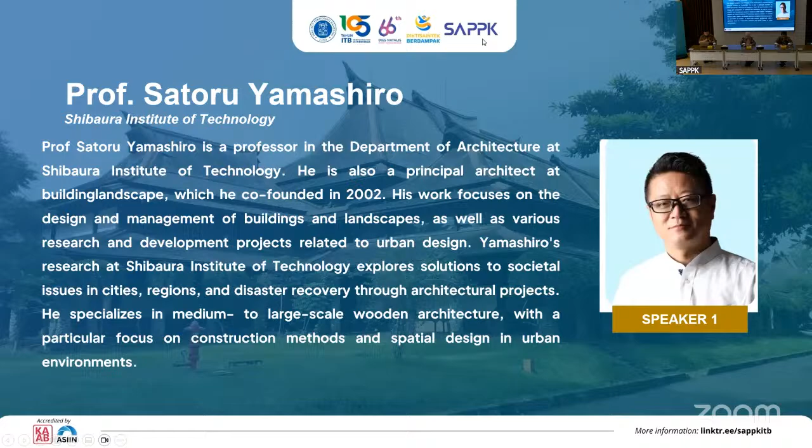Thank you very much, it's my great honor to be here. Last month in August, I visited Indonesia, some universities like IPB, ITB, and UGM. I had a very nice conversation together with the researchers and professors there. So I would like to start my presentation.

Okay, can I start? Yes. Okay, so today's title is The Rise of Urban Mass Timber, Japan's Role in the Pacific Rim. As I introduced, I'm a professor of the School of Architecture, Shibaura Institute of Technology, and director of the Research Center for Sustainable Building Engineering, Shibaura.

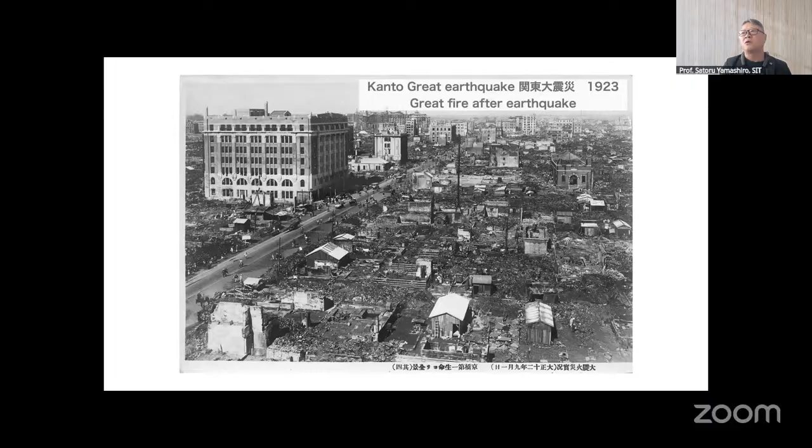We also had great bombing in 1944 and 1945. Another 100,000 people died from this bombing, and the city was burned out. Even during reconstruction from the damage of World War II, we still had many natural disasters, not only earthquakes but also typhoons. One of the biggest was the Isewan typhoon in 1959.

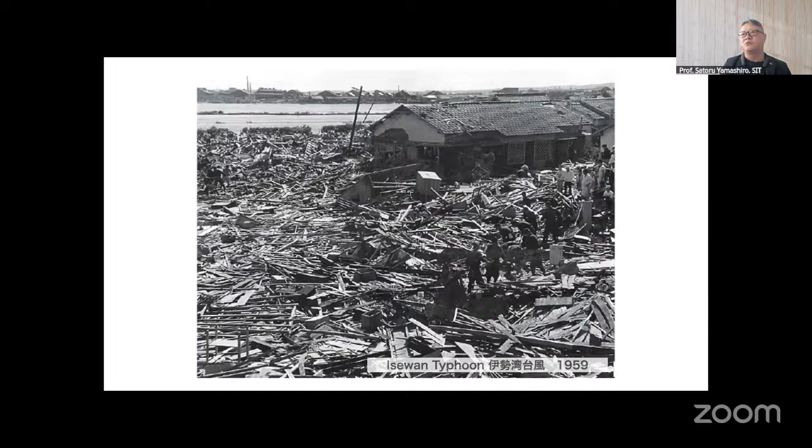We established the modern building standard after World War II, but after the Isewan typhoon we made a resolution on building disaster prevention in 1959. We call it prohibition of wooden construction, especially for public buildings.

So we reconstructed the cities as I showed you before. The cities were full of buildings with concrete and steel. But even after the resolution, researchers, architects, and government people continued their effort to progress our technology in earthquake-proof and fire-proof technologies.

Today we established new acts in 2010 and 2021 to promote the use of wood for public buildings also. So my aim is how to rebuild those buildings with timber.

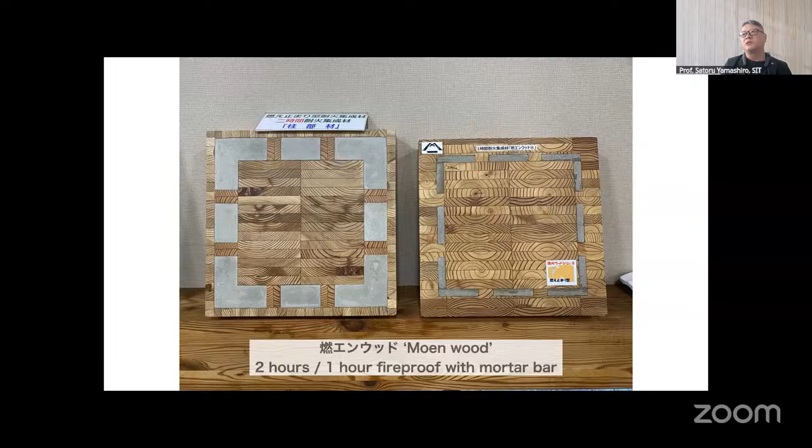This is the section of the column. The central timber structure was protected by mortar or sometimes gypsum board. It absorbed the heat of the fire. This is another example for the fireproof beam.

Obayashi Corporation, a big construction company, designed and constructed an 11-story high office building in Yokohama, in the very center of the urban condition. This is a kind of training center for the company itself, and it hosts many meeting rooms and hostel rooms for guests to join seminars.

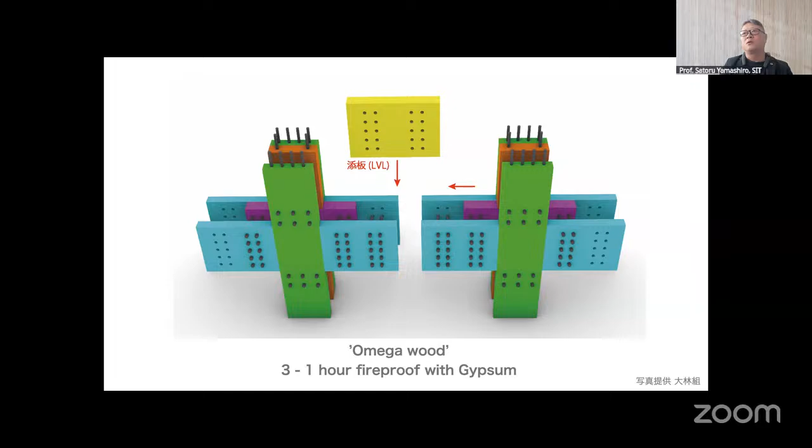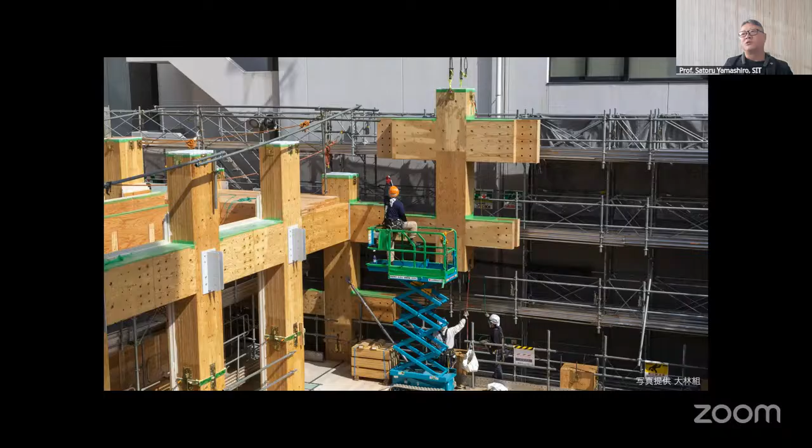Now another new headquarters office for Tokio Marine Company has started construction. The building was designed by Renzo Piano, the Italian maestro architect. It has 20 stories and is 100 meters high. This is a rendering. It will open in 2028, three years later.

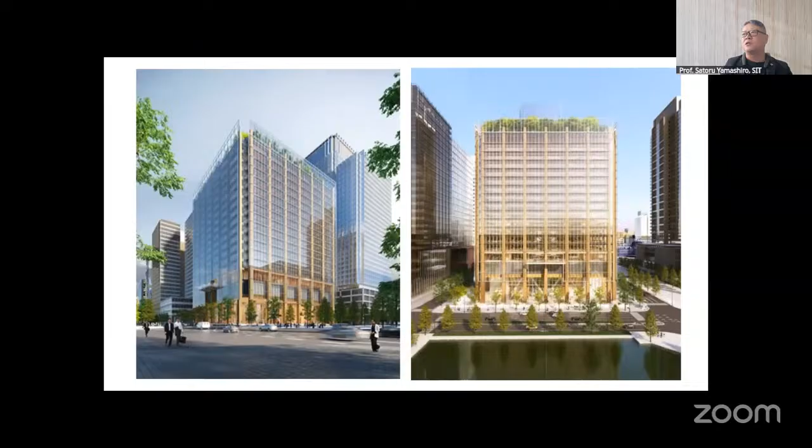From now, I would like to introduce one of my projects, just finished construction last year in Osaka. The name of the building is Riverwood Osaka-jo Castle. It has 8 floors and is 28 meters high.

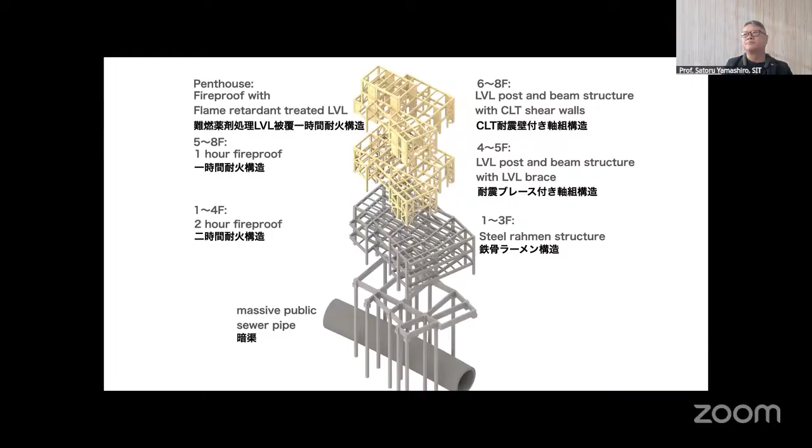To protect the structure from fire, most of the structure was covered by gypsum board. We introduced another new technology, flame retardant treated LVL, also to protect this structure from fire. Some chemically treated timber can absorb heat, and it can protect the structure from fire.

We use CLT as a seismic element. We made many joint tests to calculate the number of pins needed.

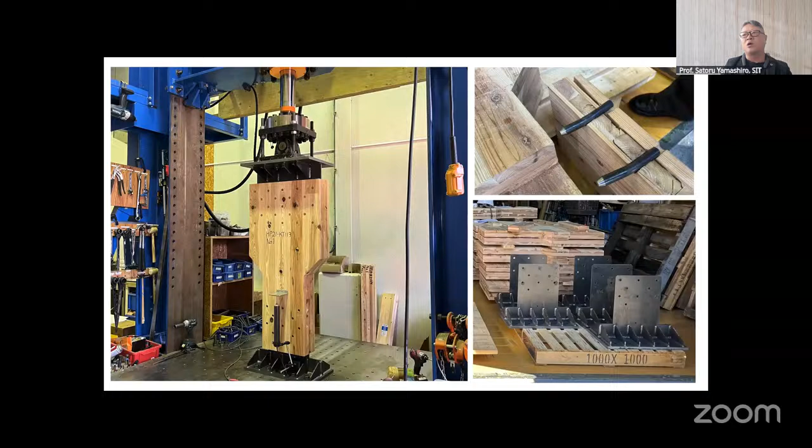Here is one picture from the construction. You can see the very massive columns and beams everywhere.

We use steel plates to joint the beam, column, and bracing together.

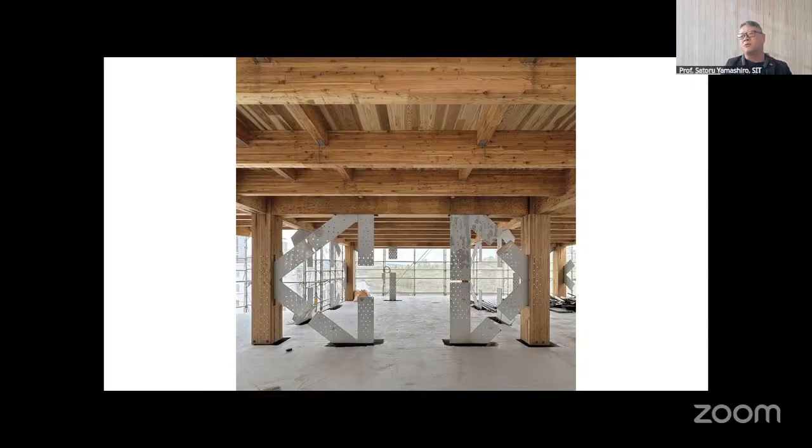To protect the structure from fire, basically we cover the column, beam, and floor with gypsum board. But as you can see, the bracing and the seismic element panel can be exposed to the interior.

So we decided to expose such a big structural element like the bracing to the interior.

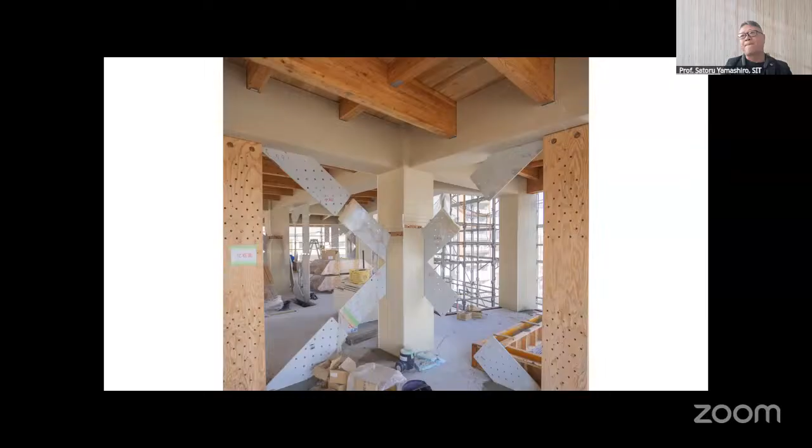This is a picture from the interior. A very massive K-shape bracing is exposed to the interior, giving a very new impression to mass timber construction.

The beam and column are covered with gypsum board. To use the CLT panel as a seismic element, we connect the CLT panel to the beams with steel plate.

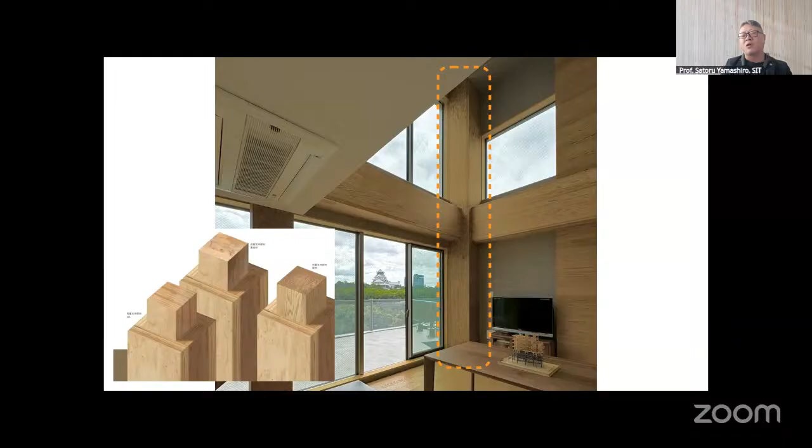This is the room for the owner. A very symbolic column was protected from fire with chemically treated LVL. This is a view from the owner's room to the castle park.

I think this could help realize a new standard for mass timber housing construction with modern technology.

While I design and construct mass timber housing, I collaborate with governmental research faculty facilities to produce prototypes of mid-scale buildings at the same time.

Of course, some people and companies continue to develop taller mass timber buildings as much as possible. But my interest is not only to build as big as possible, but to promote middle-scale buildings for society.

This is a three-story high office building model.

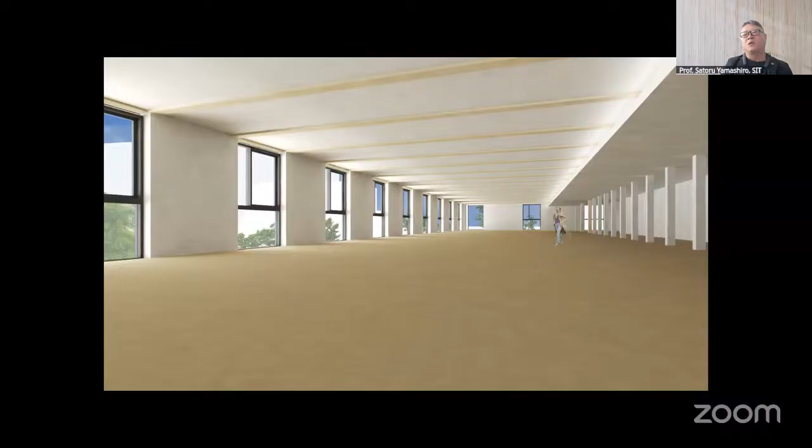Basically, most of the column and wall can be protected with gypsum board from fire.

We also designed another 4-story high model. It has a more open feeling, and the seismic element is not a panel but a big bracing that works as the seismic element.

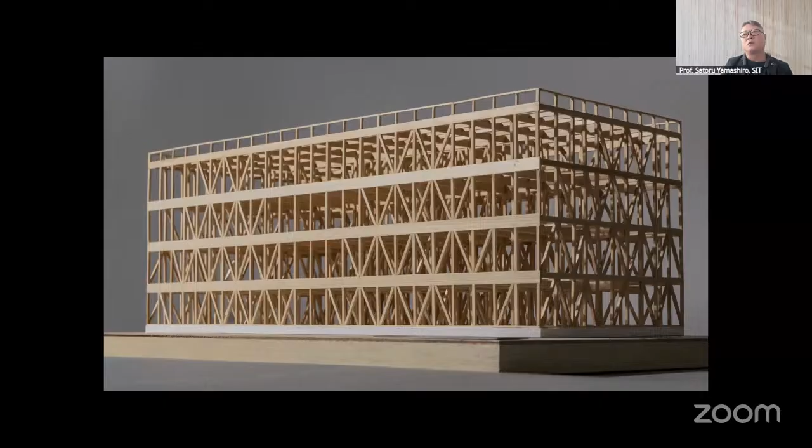It gives a more open feeling, and it can be used in many different arrangements according to different office layouts.

To promote this kind of medium and large scale wooden construction, I'm a member of the organizing team of a portal site website to share the knowledge.

Today's presentation, I will talk about technology in traditionality: development of prefabricated traditional joints and simulations. Actually, this combines my dissertation and my current research about prefabricated traditional joints.

Research background: why did I choose this topic? This is because traditional timber joints are important for supporting the rigidity of traditional buildings against gravity and lateral loads. Studying traditional timber joints contributes to understanding the behavior and performance of traditional joinery techniques and how to preserve traditional buildings. Two studies are currently explored: the first is how to analyze the performance of traditional joint systems, and the second is fabrication of traditional joints using CNC milling.

The conventional connection performance analysis from timber standards only regulates the dowel type connection, which uses metal material. The connection performance that can be calculated is load carrying capacity, based on the failure modes that happen in two types of connection: single shear connection and double shear connection. Limited to this, the calculation is based on the failure modes that happen from the many iterations of traditional joints, and the goal is to find the capacity before the connection is damaged.

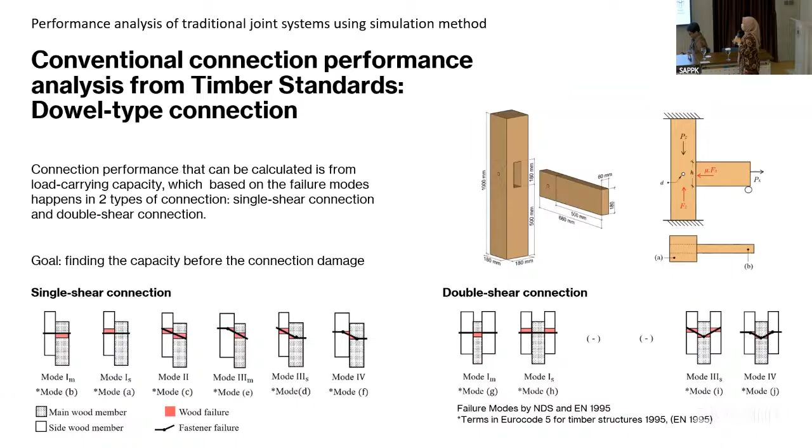When we calculated the load carrying capacity, we found that between two popular standards, National Design Specification from America and Eurocode from European countries, the NDS standard is more conservative than the Eurocode standard. From this formula, we can find the performance of the connection in the vertical direction and also the lateral direction.

But it will depend also on the adjustment factors based on the purpose of the simulation and calculation. I also made validation using numerical analysis, and the load for the simulation in finite element modeling is adjusted to the load carrying capacity from NDS and Eurocode calculation.

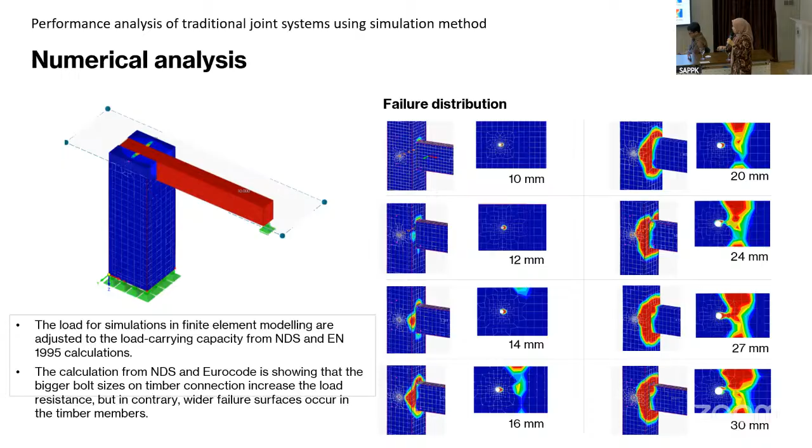I also checked the analytical analysis from the mortise and tenon joint that I chose to analyze. This is based on the Tsai-Wu model and Norris model, which are usually used for orthotropic materials that have multi-directional strength and stiffness.

And here is also convergence with the results from numerical analysis, that usually the beam members are more likely to fail than column members. Yeah, which is convergence with the calculation.

And I also analyzed the traditional timber joints using a parametric study, and I chose 14 joints to check the performance of each joint and which one has bigger capacity than the others. And I also categorized the joints based on their capability of resisting force, dividing them into two types: tension joints and compression joints.

The dimension, limit, and proportion of the model size is from the National Research Institute of Cultural Heritage in Korea. So basically, why I chose Korea, because my PhD is there, and several types of joints are also similar within Indonesia. So I chose that one because of that.

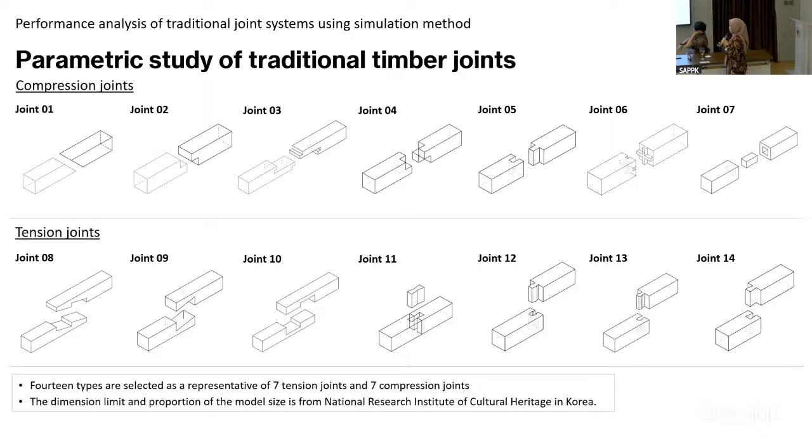And the model setup in the numerical analysis is like in the figure on the left side. And then the material properties are also determined within the material library in the software. And the result is...

Also satisfied that the movement of the joint when we add the tension force is similar to the actual experiment or test. And here are some of the results. Actually, I have all 14 joints, but I only mention three here.

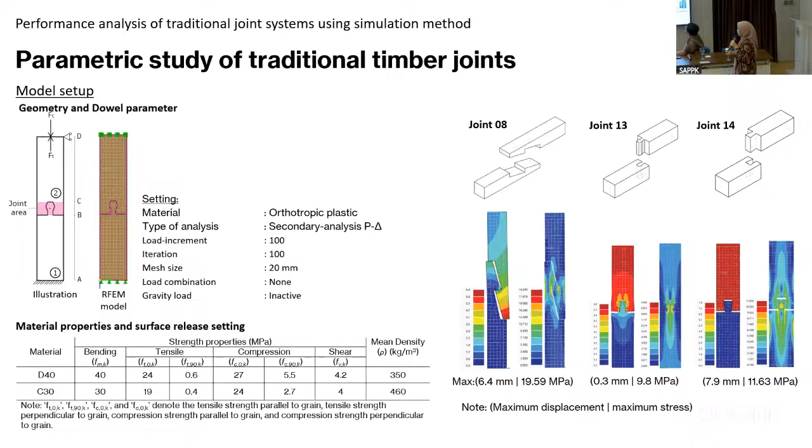And how we know whether the model is correct or not is based on the prediction of deformation and contact behavior. This is formulated based on previous studies and also how the movement of the connection itself works. So here we have diagonal friction and compression, and then full compression, and then full friction. And from this, we know what happened in each connection.

So after we did the experiment and simulation, we found several behaviors and performances of each connection, which can be divided into new categories. Based on the shape behavior, we have hook type joints and locking type joints.

The hook type joints have the characteristic of having the same shape between male and female members. And they have good performance when they have a long joint area, and good resistance on tension loads, and usually the surface contact is less than 7.

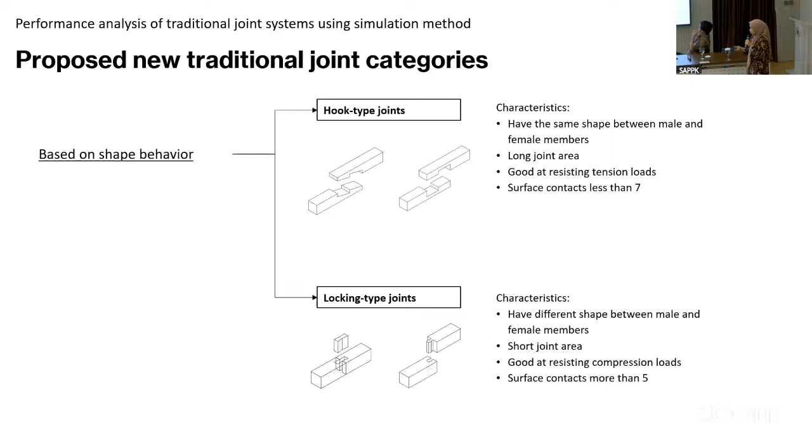And based on the tension behavior, it is divided into two types of joints: the friction type joint and the bearing type joint. The characteristic of friction type joints is that the joint relies on the friction surface, and because of that, additional dowels have a significant impact on the strength and stiffness of the joints. In contrast, in bearing type joints, the connection depends on surfaces that bear against each other and mainly relies on compression strength. So additional dowels only serve to prevent pull-out rather than prevent the connection from failing.

And after creating the method to analyze the traditional connection, I also wanted to move into how to make traditional joints easier and able to be prefabricated in the future. So the background study of traditional digital fabrication in traditional joints, I mention only two here.

Kanasaki and Tanaka's research about the patterns of traditional joints to be developed in a digital fabrication environment, which is CNC milling. And then Larsson et al. 2020 created a system to make Japanese traditional connections fabricated using CNC milling.

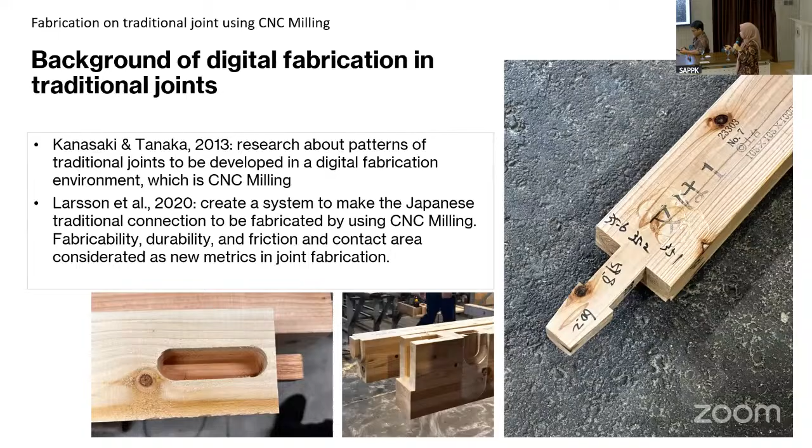And the ground theory of traditional joint fabrication includes connectivity, bridging, milling direction, checkerboard, fabricability, durability, contact area, and friction area. But right now, most factories usually already use this kind of approach, but it is limited to mass production. So in my research, the goal is how to make traditional joints become more diverse and explored more than just the traditional ones that we already know.

And this is the preliminary prototyping in digital fabrication of traditional joints. So in our building, we have this CNC milling machine, but we still need to develop the method and procedure to make it more effective and efficient.

And here is the first prototype, which is not finished yet and still being developed. But the goal is to make traditional joints able to be fabricated.

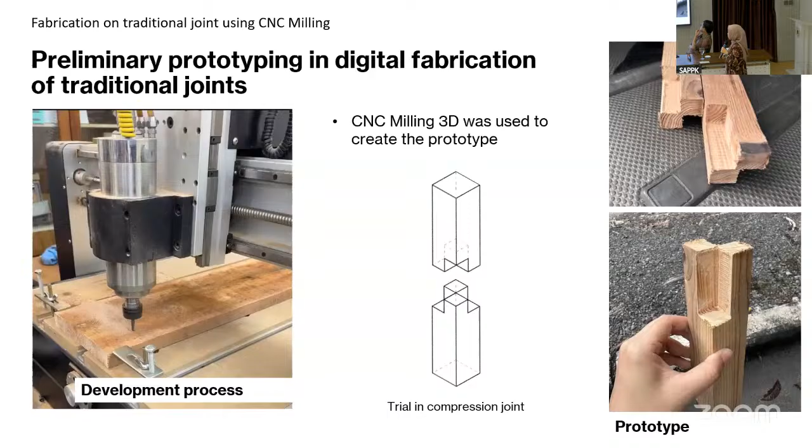So the further research goals I want to achieve: first is the development of a traditional timber joint fabrication system based on machine capabilities and efficiency. Then the formulation of traditional timber joint performance analysis for preservation and conservation of traditional buildings. And then study of strengthening methods of traditional timber buildings in Indonesia and how to apply them.

Structural investigation on traditional timber structure to understand Indonesian traditional buildings under lateral loads, which is still lacking development right now. Then exploration of more natural material for building structure to reduce carbon footprint in construction. And exploration of folded plate structure using timber material, which is actually my thesis in my master's degree.

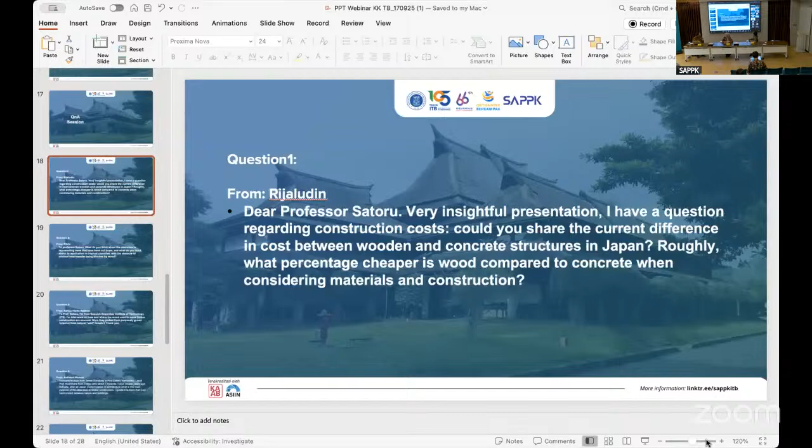The question is regarding construction costs. Could you share the current difference in cost between wooden and concrete structures in Japan? Roughly, what percentage cheaper is wood compared to concrete when considering materials and construction?

Thank you for your question. Actually, modern mass timber construction is more expensive compared to concrete structure, but today around 5 or 10% more expensive compared to moderate, popular concrete construction. I don't know the situation in Indonesia, but in Japan, the cost for concrete construction and steel construction is getting steeply more expensive. So the cost for mass timber can become equal in the near future, I think.

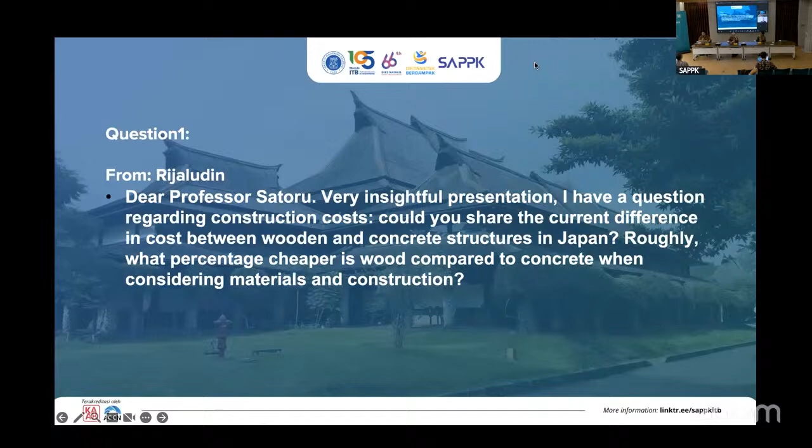Okay, please, Sensei. Sorry, I didn't ask clearly, but I think it's not clear what minimal heat transfer blocked by wood means. Did it talk about thermal insulation for the building, or how people can touch the cold thermal mass or not? Makes sense? Okay, maybe Fibria can give more context to the question. Sorry, I couldn't clearly understand your question. Okay, you may unmute first, Fibria, to give more context to the question.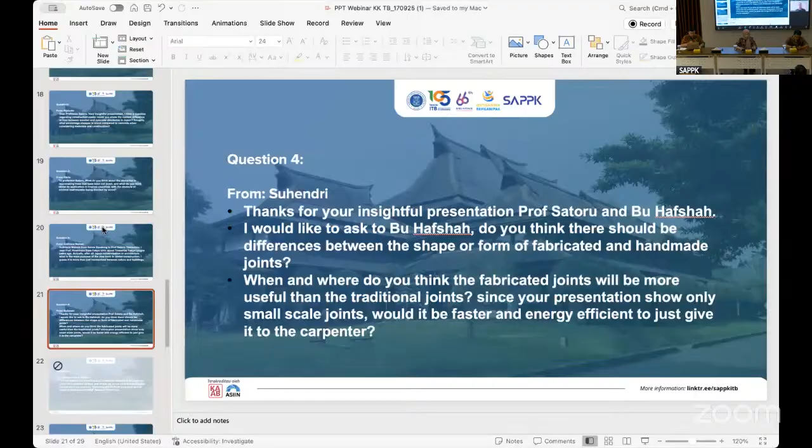Please, Sensei. Yeah, thank you very much for your question. I have a very close contact with Professor Koshihara, so I'm also influenced by him very much. I'm a member of the Timberize association, and we have many reasons to start mass timber again in Japan. One is harmonization, but we also have many economical reasons.

As you know, especially European or American companies or investment companies are investing money in the so-called ESG movement - ethics, environmental, social, governance things. So Japan also needs to attract such money, and carbon neutrality is one of the most important aspects of our development in Japan. To realize decarbonization or a carbon neutral society, mass timber is very much focused on today in Japan, I think.

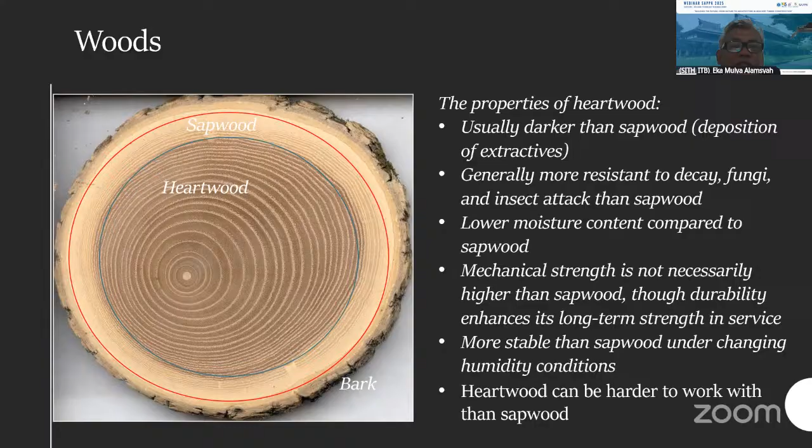Chemically, all wood is composed of cellulose, lignin, hemicellulose, and minor amounts, usually less than 10%, of chemical extraneous materials. Variation in the proportion of these components makes wood heavy or light, stiff or flexible, hard or soft, and affects its degree of durability.

In fresh wood, some key advantages include: fresh wood has natural beauty with unique grain patterns and texture that add warmth and character to any space. High quality fresh wood can be incredibly durable and long lasting, making it a great investment for furniture and construction. Wood is a renewable resource, especially when sourced from responsibly managed forests. It's highly versatile and can be used in a wide range of applications, from construction to furniture. Wood has excellent acoustic properties, which is why it is often used in musical instruments and spaces designed for listening to music. It has natural insulating properties, helping to maintain comfortable indoor temperature.

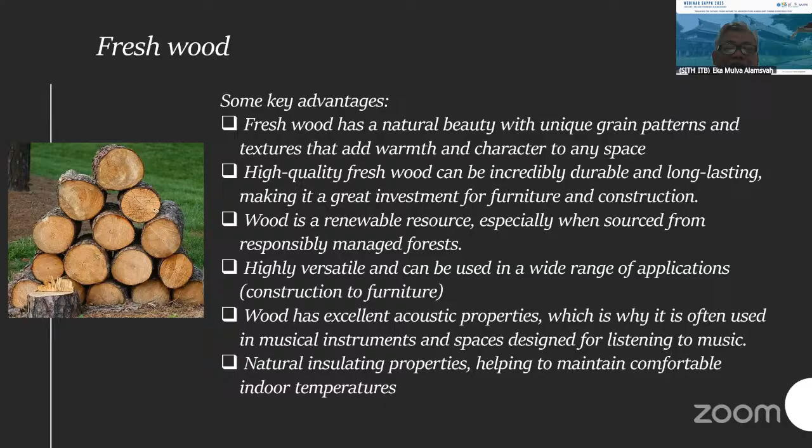However, during the post-harvest period, timber is prone to fungal and insect attack during storage as the moisture content is very high. On a freshly cut tree, the moisture content can be anywhere from 30 to 45%. This is called greenwood or green moisture content.

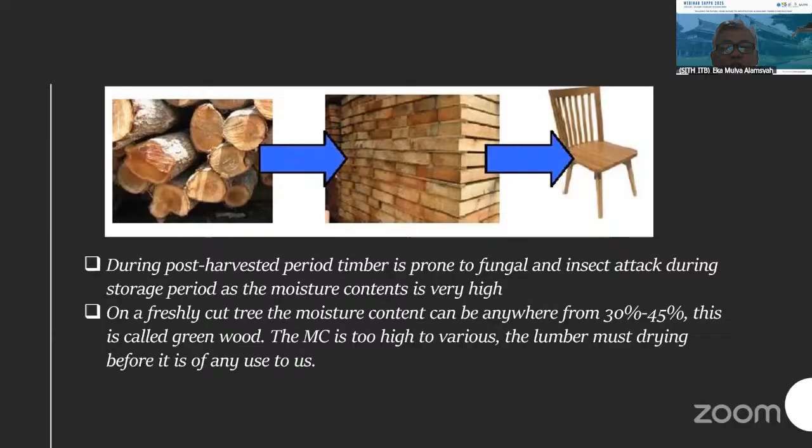By physical and mechanical effects, wood can be degraded. Some occur as change in cross-sectional dimension, like swelling and shrinkage. Strength and stiffness decrease as moisture content increases. Durability is affected, and coating can be compromised, especially covering the surface part of the wood.

Chemical effect of degradation in wood can be color change, such as yellowing, darkening, or graying. Reduction in pH causes it to become more acidic, with decline in strength, elasticity, and dimensional stability, and increased porosity due to cell wall breakdown.

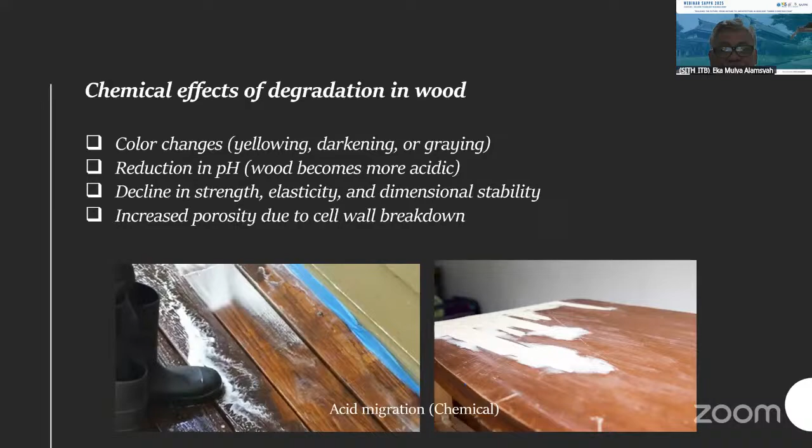Biological effect of degradation in wood is driven by fungi, such as brown rot, dry rot, soft rot, and insects such as termites, beetles, and ants. Their combined effect includes loss of structural integrity, discoloration, tunneling, and eventual collapse of wood material.

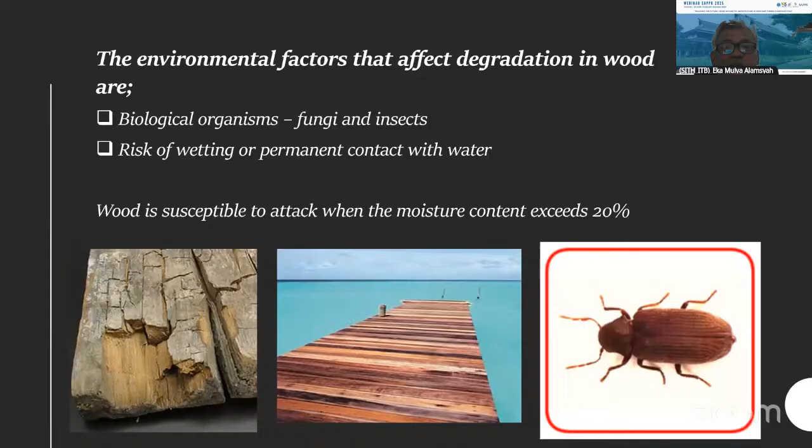The environmental factors that affect degradation in wood are biological organisms, such as fungi and insects, and risk of wetting or permanent contact with water, as you can see in the middle of the picture here. Wood is susceptible to attack when the moisture content exceeds 20%.

In chapter 2, I'd like to talk about quality enhancement of wood. Some of the problems when we use wood are that it is not resistant to humidity, and there is an effect of ultraviolet instability. The dimensions are unstable, and it lacks resistance to fungal, insect, and weathering damage. The surface is soft. Because of that, we have to improve the quality of wood before we use it as a product.

How to solve these problems? There are many methods. First, using high quality wood. Second, using naturally durable wood. Third, using wood preservative. Fourth, use dry wood. And the last one, use of technology in wood treatment.

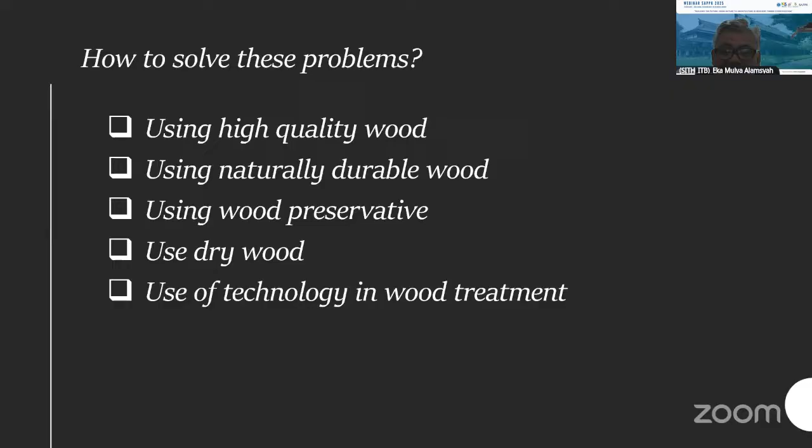On the other hand, since the 2000s, the government has supported the people of Indonesia to grow trees in plantation forests. So that until this year, we can see that wood from plantation forests is leading to support or supply wood material to the wood industry in Indonesia. However, this policy has resulted in the use of wood of lower quality compared to the wood quality from the natural forest.

Because of that, we have to use some methods to increase the quality of wood with technology. First, wood drying technology. Forest products, especially wood, contain a certain amount of water in them which must be removed because it has a very detrimental effect on their use. The process of removing the water content in forest product material is called wood drying.

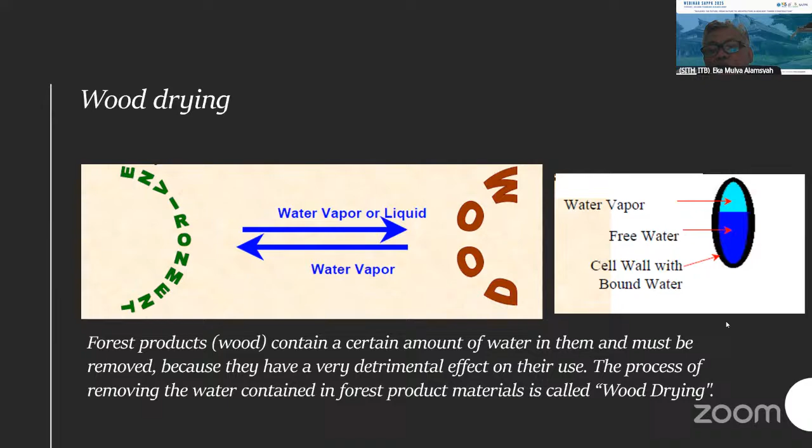Common defects in wood drying include crook, bow, twist, cup, collapse, surface checking, internal checking, and internal stresses. Distortion can be the consequence of a number of factors, including variable shrinkage of wood in different directions or at different angles, and excessive internal stress.

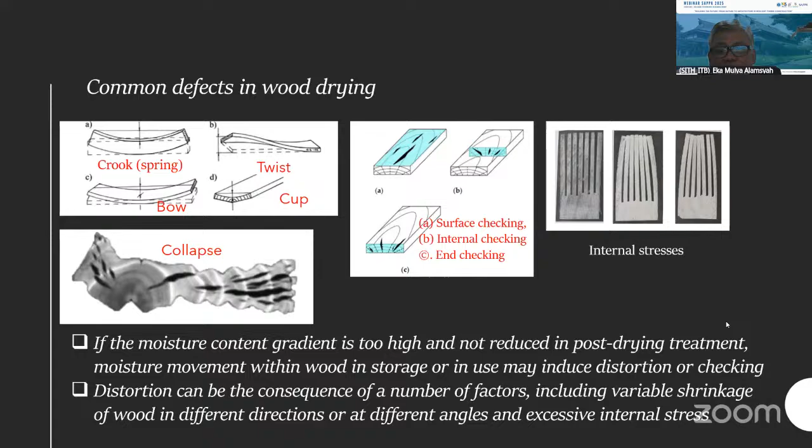Drying is an effort to ensure the stability of the size of wood before use. Below the fiber saturation point, change in moisture content can result in swelling or shrinkage. On the other hand, if it is dried too close to the environmental water content, the swelling and shrinkage characteristics will be overcome and can even be eliminated.

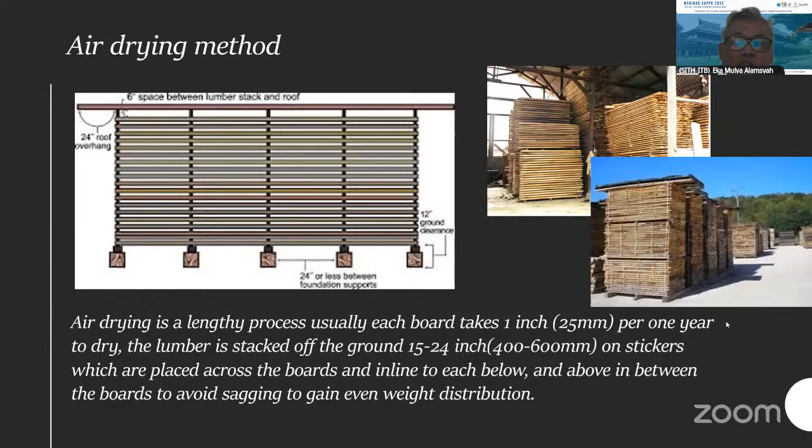This is some methods in the drying technology. First is the air drying method. Air drying is a lengthy process; usually a board takes 1 inch per year to dry. The lumber is stacked off the ground 15 to 24 inches on stickers, which are placed across the board and in line above and below each other, in between the boards, to avoid sagging and to gain even weight distribution.

The second method is the kiln dry method. Kiln drying is a faster but controlled process where humidity and temperature are controlled using steam and fans for drying. The drying process normally takes between 6 to 8 weeks. Because of its fast drying due to high temperatures, the cell collapses quickly rather than slowly as it would with air drying, making it unstable.

The second technology is wood preservation. During the post-harvest period, timber and bamboo are prone to fungal and insect attack during storage as the moisture content is very high. The types of insects include termites and wood borers; the types of fungi include rotting fungus, softening fungus, stain fungus; and the last type is marine borers, mollusca and crustacea.

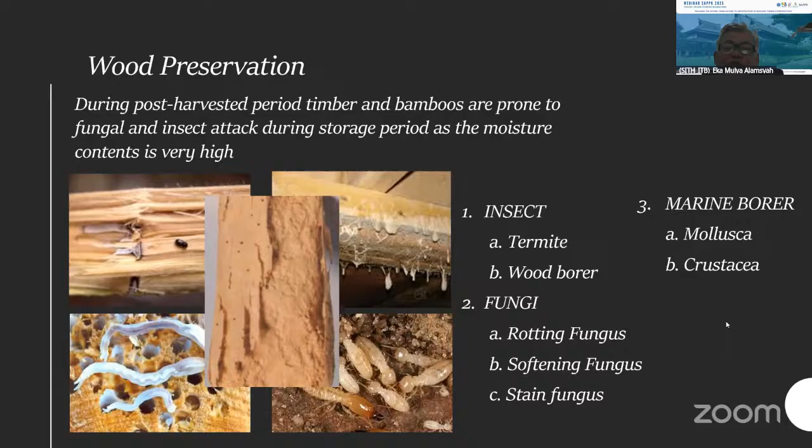Wood preservation is chemical and/or physical treatment of wood to extend its useful life. In everyday reality, what is meant by wood preservation is the process of inserting chemicals into wood to increase its durability. The purpose of wood preservation is to incorporate preservative into the wood so that continuous layers of treated wood contain

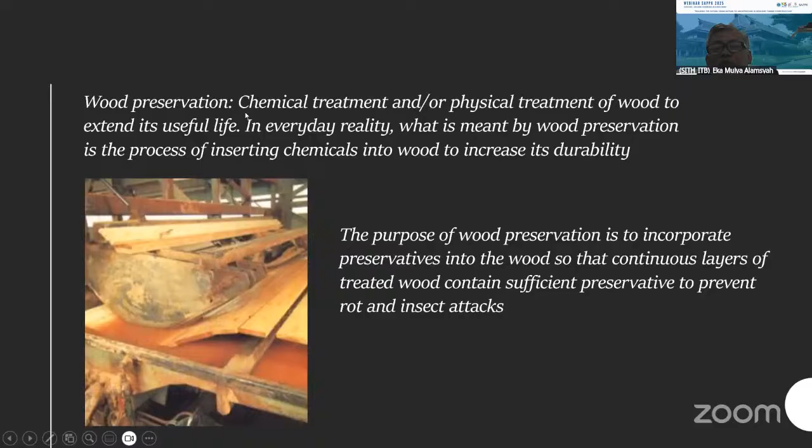sufficient preservative to prevent rot and insect attack. These are some methods of wood preservation. We can see from the simple method to the high technology method. First, we can use the coating method, spraying method, dipping method, soaking method, sap displacement method, and diffusion process.

The last one is the vacuum pressure method. This method is highly recommended for preserving wood that will be used in the construction of bridges, cooling towers, ports, and residential buildings, because the preservative material can be easily incorporated with the cell of the wood compared to the other methods.

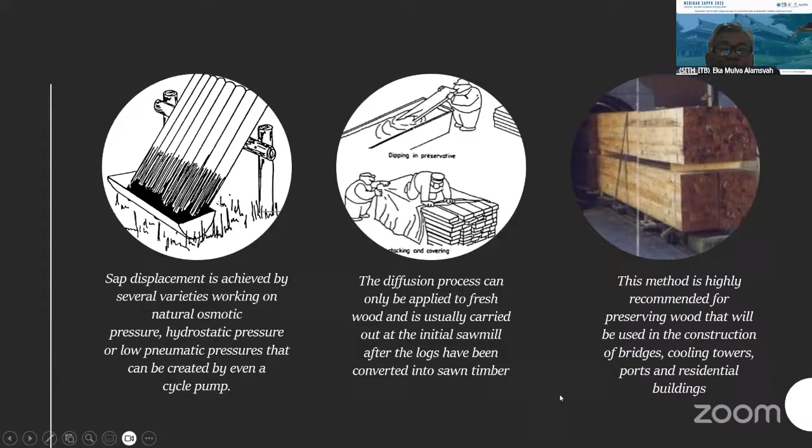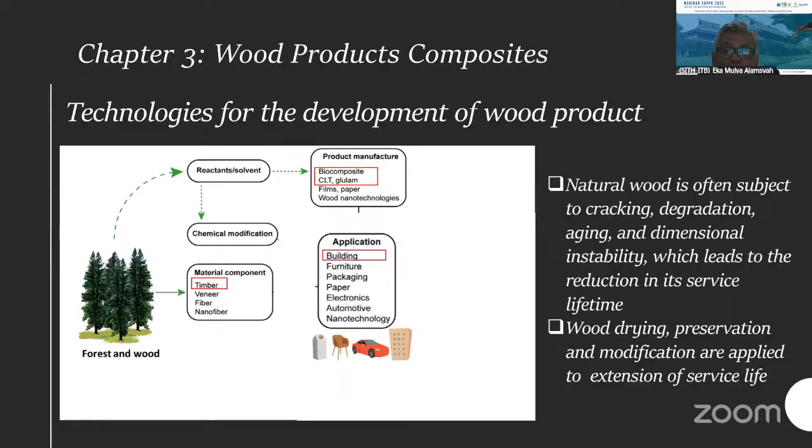And chapter 3, I'd like to talk about wood product composites, technologies for the development of wood products. Natural wood is often subject to cracking, degradation, aging, and dimensional instability, which leads to a reduction in its service lifetime. Wood drying, preservation, and modification are applied for extension of service life, especially in material components of timber or biocomposite CLT and glulam for building application. It is a kind of wood product composite.

Wood product composites are engineered materials made by combining wood elements—veneer, strand, or particles—with adhesive, resin, or other additives to produce materials with enhanced strength, durability, stability, and versatility compared to solid wood. Some wood product composites include LVL, PSL, LSL, OSB, plywood, particle board, and fiberboard.

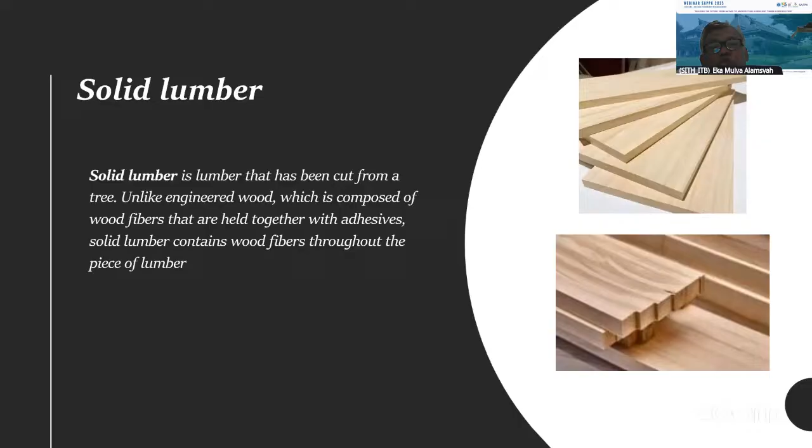Solid lumber is lumber that has been just cut from a tree, unlike engineered wood, which is composed of wood fibers that are held together with adhesive. Solid lumber contains wood fiber throughout the piece of lumber.

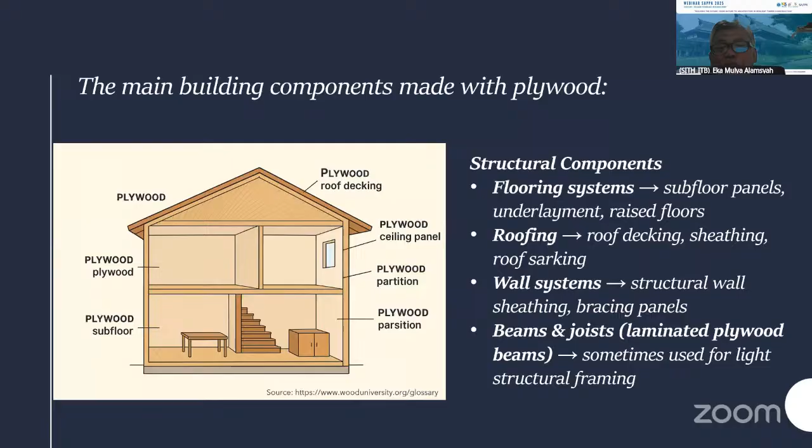Plywood is widely used in building components because of its unique properties that make it stronger, more stable, and more versatile than solid wood—strength and stability with the grain direction alternating at 90 degrees. Plywood also has dimensional stability. The main building components made with plywood are structural components such as flooring systems, roofing, wall systems, beams, and joists.

Second is hardboard, also called high-density fiberboard or HDF, a type of fiberboard which is an engineered wood product. It is used in furniture and in the construction industry. The main building components made with hardboard are wall and ceiling panels, doors, screens, flooring, underlayment, furniture panels, and sometimes exterior siding of tempered wood.

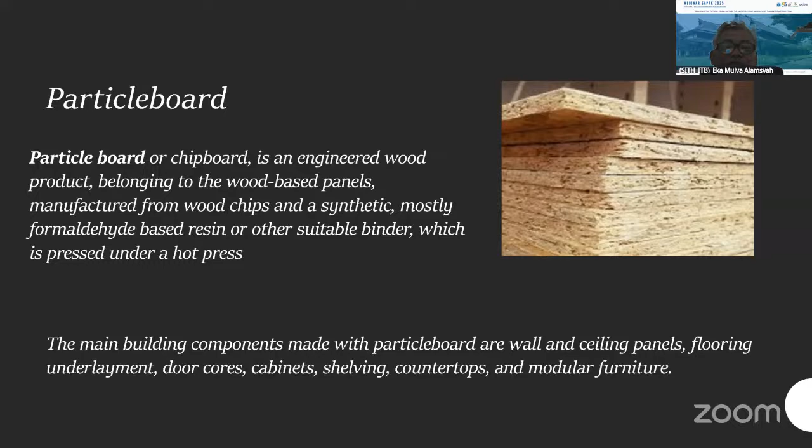Particle board or chipboard is an engineered wood product belonging to the wood-based panels, manufactured from wood chips and a synthetic, mostly formaldehyde-based resin or other suitable binder, which is pressed under a hot press. The main building components made with particle board are wall and ceiling panels, flooring underlayment, door cores, cabinets, shelving, countertops, and modular furniture.

We can see a comparison among plywood, hardboard, and particle board. Plywood: strong, stable, and available in large sheets, suitable for both structural and decorative purposes. Hardboard: very smooth surface but dense, used mainly for non-structural components, with a tempered version for limited exterior use. Particle board: economical, flat and smooth, but less strong and less moisture resistant, mainly used for interior function.

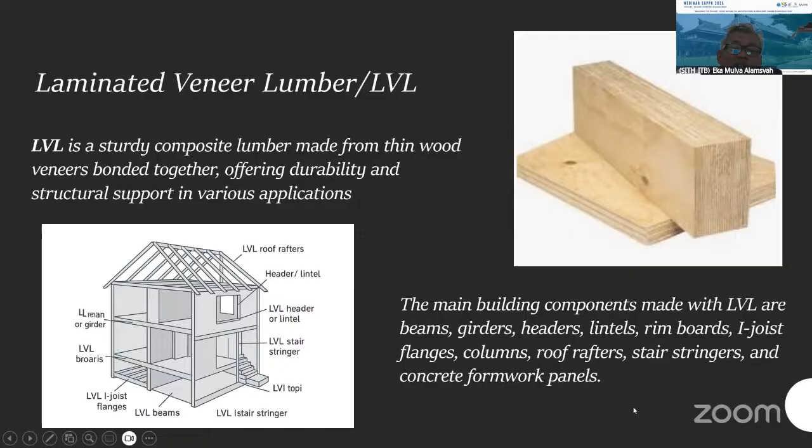Next is laminated veneer lumber, or LVL. LVL is a sturdy composite lumber made from thin wood veneers bonded together, offering durability and structural support in various applications. The main building components made with LVL are beams, girders, headers, rim boards, I-joist flanges, columns, roof rafters, stringers, and concrete formwork panels, like in this picture.

Cross-laminated timber, or CLT, is an engineered wood product consisting of layers of kiln-dried dimension lumber oriented at right angles and glued to form structural panels. The main building components made with CLT are load-bearing walls, floor slabs, roof panels, stairs, elevator/stair cores, and modular building units.

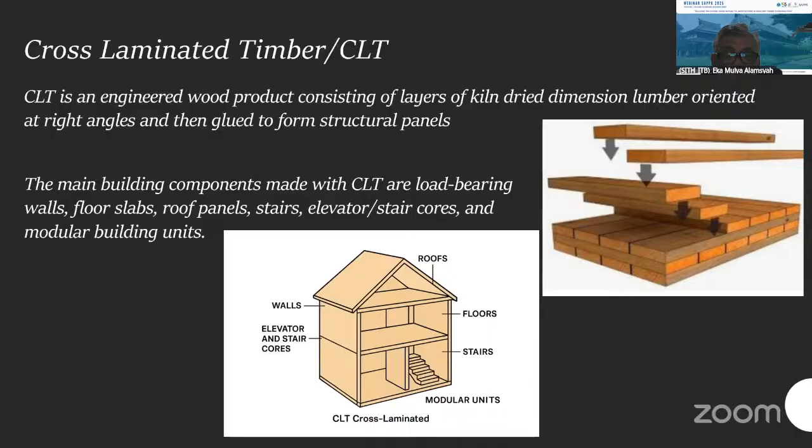Oriented strand board, or OSB, is also a kind of wood composite. OSB is a versatile engineered wood panel crafted with waterproof heat-cured adhesive, featuring rectangular wood strands arranged in cross-oriented layers. The main building components made with OSB are walls and roofs, floors, subflooring, joist webs, side panels, and modular building units.

And the last one is hybrid composite. Hybrid wood composites are engineered materials made by combining wood, natural fiber, fine particles, or strands with other materials such as polymers, metals, or different types of wood-based composites to enhance performance.

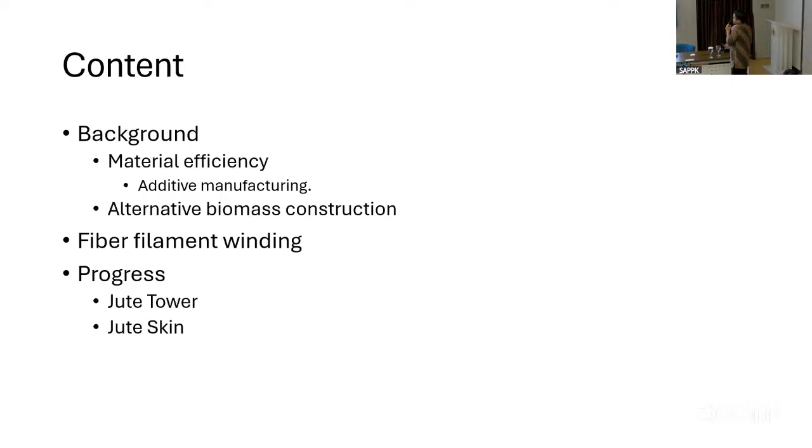First is the background. Much of my research is concerned that the current construction industry focuses on increasing the efficiency of the process of making buildings and components, but less on the material itself. We make rectangular buildings because it's easier to make, people understand it easily, and workers can work with it easily. But we all know that to distribute load, it's better to have an efficient form.

Building materials are produced to accommodate various uses. Thus the design has to be adjusted according to available building components, reducing our possibilities—like when we want to make a steel building, we have to see what's available in the market before we can design it in detail. Timber, I think, is also done this way; it's traditionally produced, used, and built with in the form of panels, planks, or beams. This makes sense—it doesn't mean it's bad, because trees grow in one direction anyway.

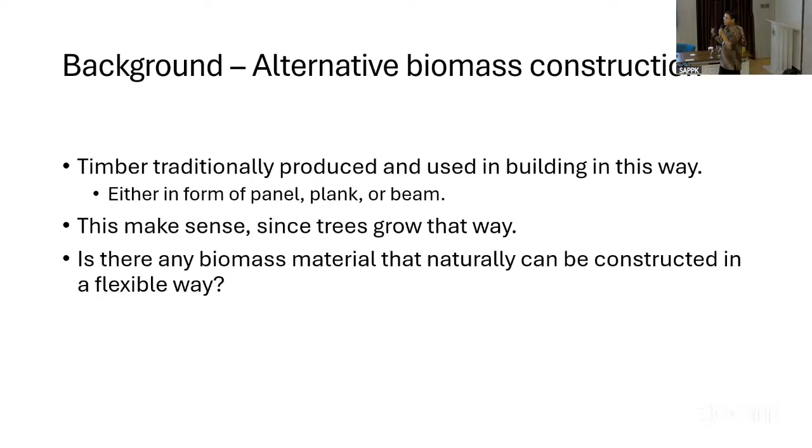So we have to make use of what's naturally grown, designing based on its anisotropic properties. But I've always been wondering if there's any other biomass material that can store carbon and naturally be constructed in a more flexible way, allowing an architect or designer to play with it more flexibly. So I'm thinking about fibers, since they are the building blocks of trees and plants—flexible and small.

However, many construction systems that use fiber have to use short fiber in random orientation—for example GRC, where we have to mix it, or Hemcrete or OSB as shown before, because it's easier to work with if we cut the fiber first. But this is counterproductive to what fiber is good for, since the longer it is, the stronger it is in tension.

So is there any way to use fiber in long form, like in the form of filament, such as carbon fiber, or a rope that already exists?

So there is a fabrication method used in the composite industry called filament winding. That's where the name comes from. It's a method where filaments are tied into position based on requirement. That's basically how carbon fiber tube is made - it's tensioned, dipped or impregnated into a resin bath, then wound onto its core. That's why they always have a core.

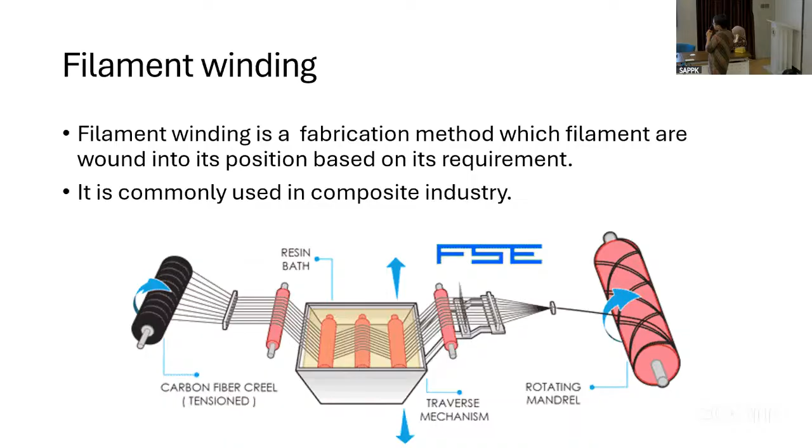Then in the architecture discipline, it was evolved by some institutions to make it bigger and less wasteful, by removing the core. Previously winding was made by molding a mold. Unfortunately this isn't in ITB yet, but what they developed is something where they still have a frame or some kind of mold, but smaller, and it expands into the actual, bigger size. If you want to make a building one by one with a whole core, imagine how difficult and expensive that is. So they call it coreless fiber winding, even though this is just one of the different methods. Basically what they're aiming for is a bigger size with less waste.

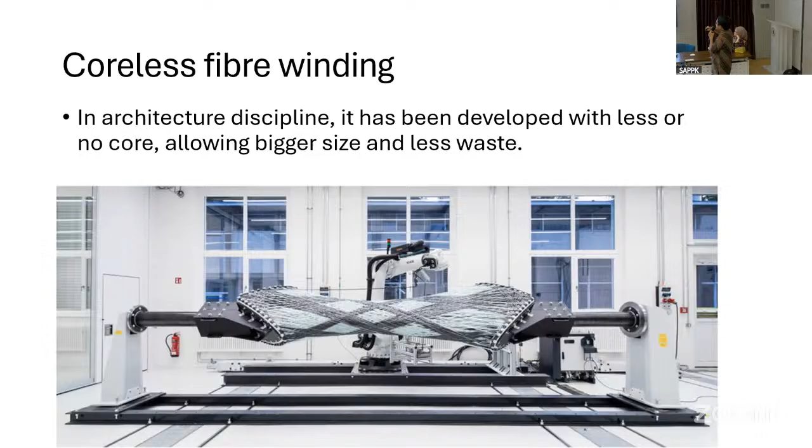The first thing I found about this technology is that we're using carbon fiber, but many institutions already start doing it with natural fiber. I think in this building they are using flax or linen. There are many institutions emerging using natural fiber in filament winding construction. This is similar to the carbon fiber method where they use resin to harden it, but there's also research using clay to combine with it.

Previously, clay and fiber were combined with mixed or random orientation of fiber. Right now they orient the fiber according to the strength required, so I think it's very efficient and very high in percentage of fiber.

Okay, so I want to explore this in my research, but reading the articles, there are a lot of milestones to be done - for example the form finding, the physical properties, mechanical properties, and all of it. When I read the journals, they affect each other. Different shapes will have different mechanical properties. Different mechanical properties of the resin, for example, will affect the fabrication and the final product, in both positive and negative ways. The type of fiber we use also affects the construction process, fabrication process, and the result, which sometimes work against each other.

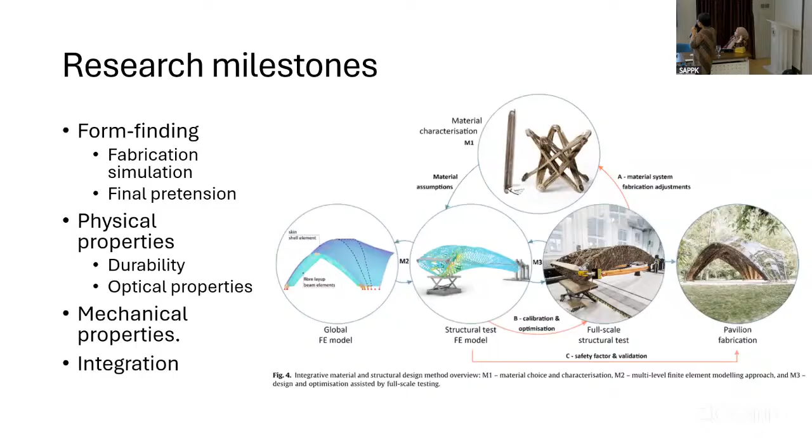So here I'm quite confused how to start. Instead, I use an exploratory approach, starting with the current boundaries that we want. So I narrowed it down into material and several other things.

For example, the material I'm using - I'll start with jute. Jute in Indonesia is called rami or karung goni. It's very commonly sold in Indonesia, whether produced locally or imported from India or Bangladesh. I think India, Bangladesh, and China dominate the market.

Also, the arm reach of the robotic arm, which ITB has, is only 1 meter in reach, without any other system or additional robots or setup to help. And also the end effector, the tool that will spin the fiber - we have no sensor or actuator yet, so the rest of the control needs to be done manually. So we start with that limitation, and we started prototyping, keeping the problem as narrow as possible first.

Fortunately we had two opportunities to explore the possibilities we have. First is a jute tower - it's an installation we showed at Atria 2024. It's a 3-meter tower installation using a panel of jute fiber integrated with natural glue. The main structure is actually the steel bar, so it has no use of strength at all.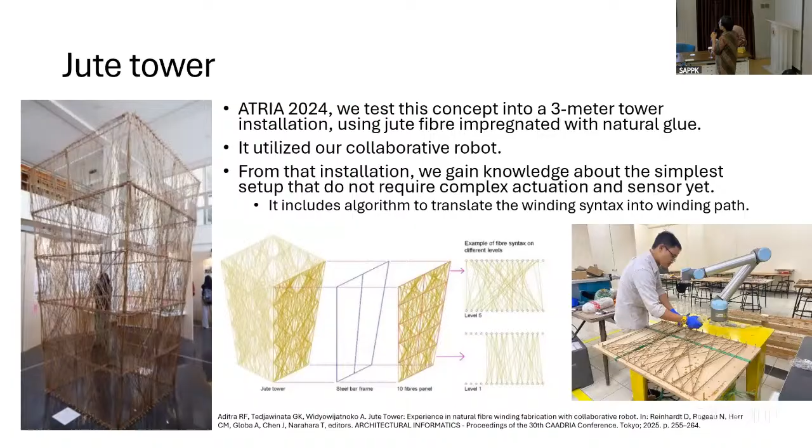So in this case, I'm not thinking about the strength, even its own strength without needing to resist any load from the outside. And because of that, there are things to improve - for example the weak tension, because it's not designed to be strong anyway.

The fiber is not tensioned well, because of its flat surface, and the resin is not strong enough for such a thin panel. It's very easily bent. Then there's low impregnation of the resin.

In 2024, we used one rope passing through the resin in this range. So in many cases, because we have to hasten the winding, the resin doesn't really stick into the rope. So we start with this to improve in the next installation.

So in the next installation, we try to have some aim. What are we actually trying to make here? The closest application that we are aiming for is a secondary skin, because to make something structural, there's a lot of mechanical properties and mechanical simulation that has to be done. So we skip that and focus, at the very least, on its own shape first.

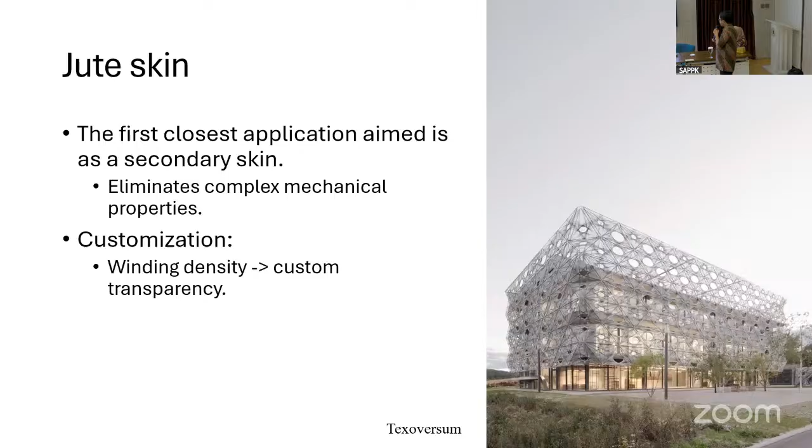The customization which the fiber filament winding can be used for is to customize the density of the winding, which could customize the transparency as a secondary skin is used for. This is an example of one building that actually uses it. It's the same institute that developed this research. This is using carbon fiber.

So first we start trying to find what form-active shape can be used. I'm going for a saddle shape, or hyperbolic paraboloid. This is the image of it in the membrane. It's a very simple shape, but it has two axes of mesh that work in two directions.

The question is how to make this kind of mesh with just one rope. It's basically connecting ropes, right? So I try to use a mock-up first. With my hand, with a rope, I try to find the concept, and we found a simple and symmetric shape.

So it's basically symmetric in four quadrants, and the direction is from here, here, here, here, here, here, here, here. Yeah, so it's very simple.

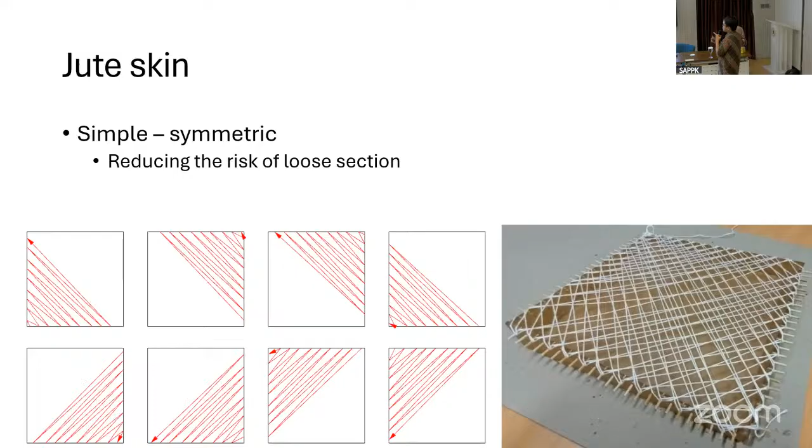It's reducing the risk of loose sections in several places. If this shape is to be lengthened in one direction, for example, there might be a chance that several areas are not touching each other between the wire.

This is also a very simple script to adjust the density. As I said before, if this is to be used conceptually as a secondary skin, we can simply adjust the density or the translucency by skipping some nodes. For example, this is without any nodes skipped, this is 2 nodes skipped, and this is 4 nodes skipped. Depending on the initial density, we can reduce it very flexibly.

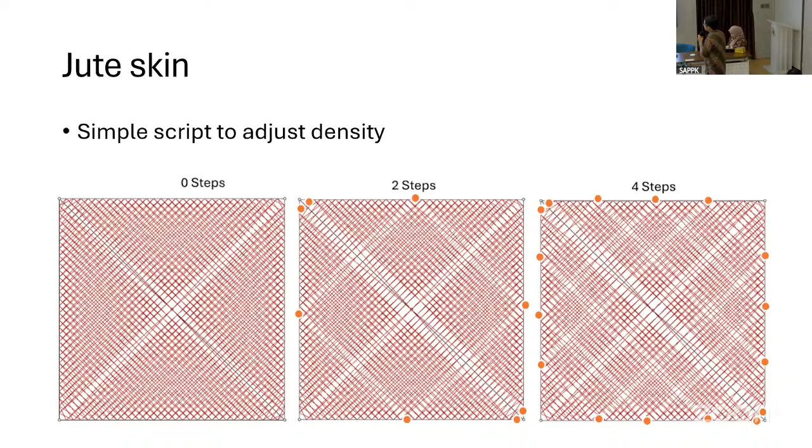Because this is a very sensitive fabrication method, we have to simulate from design to fabrication, because the design itself affects the fabrication. So through the script, we simulate the dimension, the simplified model for the aesthetic purpose, the winding path, which is the direction of the robots, and the robot kinematic simulation, which defines whether that winding path is possible for that robot.

So here we test the maximum size that we can do, the achievable curvature that we can do, and also the number of dowels.

So we also updated a little bit in the fabrication. First, previously, as I mentioned before, I used 1 rope, but this one I use 4 ropes, but smaller ropes. With that, we are able to mix it with the resin better, because it's 4 strands going out, passing through the resin. So more surface area to contact with the resin.

This is also actually good for structural purposes. Unlike my intuition, it turns out that for this technology, for this structure, a straight fiber is better than a spooled rope, because the final product is not only for tension, but also for compression. So having straight fibers in parallel with the direction of the filament is better. By using a smaller strand that is combined without any rotation, without any spooling, is actually better.

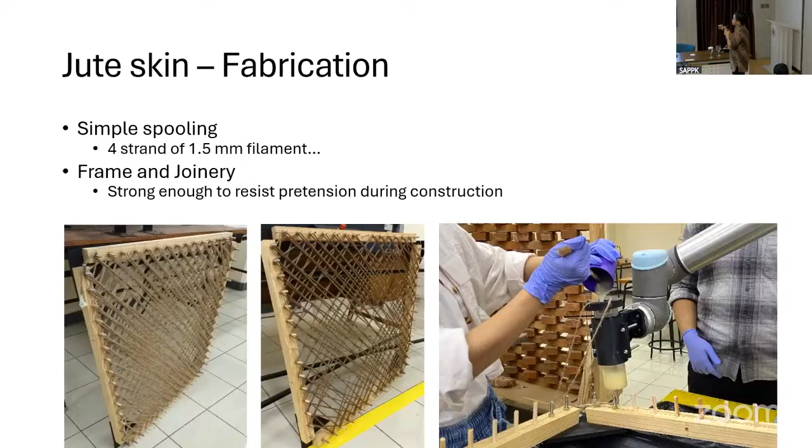Compared to the previous one, the frame is smaller, so it's only three steel bars, and in some places they can be extended to themselves, they can hold to themselves like this.

This frame is now in our basement, and I already tried cutting some of the frame, removing it from its place. What we found is that the pretension has significantly decreased—I can't even say there is pretension anymore once it is dry. So we don't really need that strong frame once it's dry. Maybe in the next step we need to separate between the frame, which will be there in the final product, and the molding, which only needs to stay in place while it's still drying.

Hopefully we can have something where right now the frame is quite thick, dominating the whole installation, even though the aim is for something very light.

So the next issue is precision. Maybe you can see it here compared to the simulation made before—this is very hollow, I would say very translucent. The number of fibers is very sparse, because we could only reduce the distance of the dowel to 4 centimeters. Previously it was 6; we reduced it to 4 centimeters between dowels, and that's already colliding frequently because we are using a plastic end effector—we 3D printed it, so it's very loose. In some way it helps, because when it collides it can move by itself, but it's less precise and doesn't allow us to make a denser dowel arrangement.

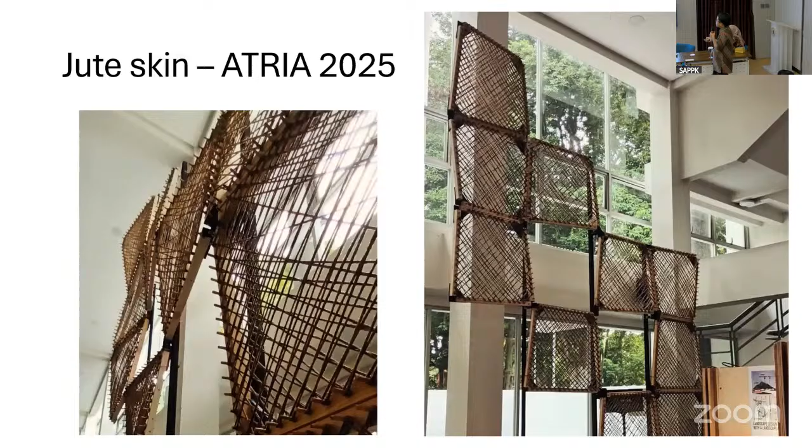So the conclusion from what we learned from these two projects so far: if there's a clear boundary and limitation on what we can make anyway, we might as well limit the problem to that boundary. Up until now, at the very least, this shape doesn't really require sensors or actuators, because during winding we don't really need to pull the wire or the fibers, or measure the tensile force at this point, and the shape is still fine. So if there is a clear boundary, we might as well limit to that problem, and you can skip some of it.

This result also shows there is potential to use natural fiber with the fiber filament winding fabrication method.

And the last thing—I think many people, when shown this research, always think about automation, but actually compared to already developed research, what we built here is very simple. We don't have any sensor or additional actuator. The robot is only used for positioning, and you can always do that manually. So in the end, we can always alter the rate of automation that we want.

The next milestone is to make something bigger—bigger design and fabrication, something like this—and to test the physical properties, for example toxicity and durability. Because right now I'm still using epoxy resin, which I know is not good against sunlight. You have to add additives, and it still only lasts up to about 10 years, if I'm not mistaken.

And the last one—this will be the last because it's the most difficult, I think—is the mechanical properties needed to shift this into a structural component. I think that's all from me. Thank you.

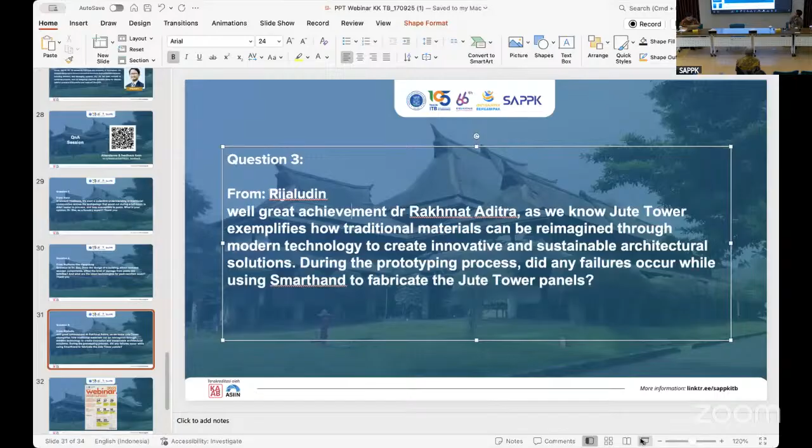Okay, thank you. Due to time constraint, we have a final question, this one for Dr. Rakhmat from Rijal. So, well, great achievement, Dr. Rakhmat. As we know, Jute Tower exemplifies how traditional materials can be reimagined through modern technology to create innovative and sustainable architectural solutions. During the prototyping process, did any failures occur while using Smarthand or the robotic hand to fabricate the jute tower panels?

Okay, thank you Mr. Rijal. Is there any failures? Fortunately there is no failure in the robotic arm because that's expensive, but the remaining things, there's a lot. I cracked many, not bones, but the 3D printed prototype setup. For example, the end effector, I cracked several times. I also changed the syringe several times because the epoxy got stuck in there, and basically all of it because of the collision I mentioned before, where the precision matters.

Even in that 4 centimeters, which is quite big in terms of fabrication, right? In manufacturing their error is millimeters. In my case, 4 centimeters is already colliding. Because I'm using plastic, which after several panels are made, becomes deformed, and I need something more robust, like steel, which is quite expensive. So yeah, the failure is mostly collisions.